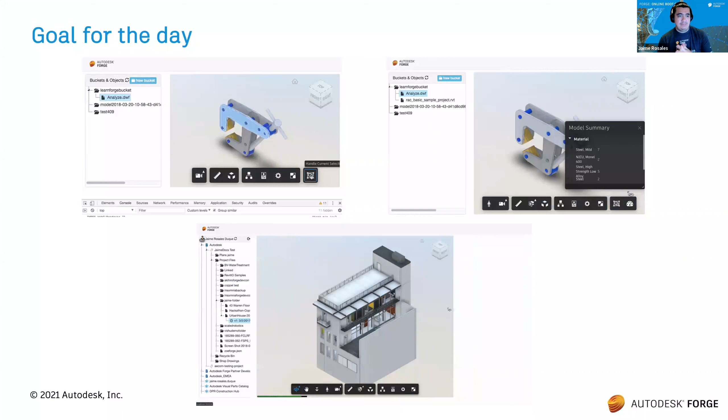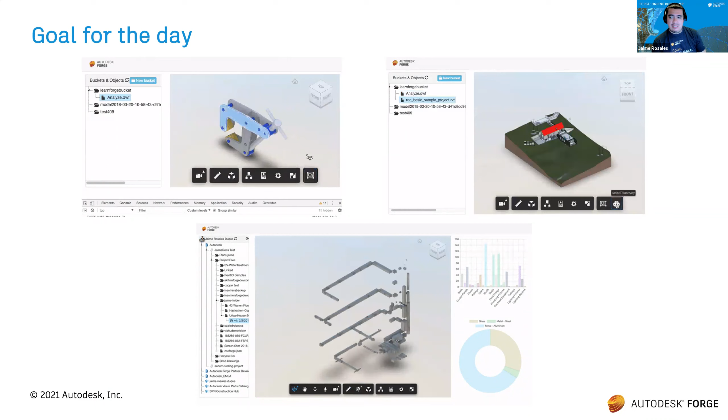So day 3, like I said, we're going to be customizing the viewer and adding dashboard functionality. What that's going to look like is basically this - we're going to be doing 3 things today, starting with the top left: adding a simple extension to the toolbar. What it does is when we select some objects in the model and click on the extension, it recognizes which ones are selected, giving us the IDs for those elements. Then we do a viewer isolation of the selected objects, making them the focus for the display in the viewer.

The second extension, top right, is basically getting access to a model summary. We know the models have a lot of metadata, and we want to focus on some specific data that comes from there. So if you have a manufacturing model, we might focus on the model summary of the material, but if we have AEC models, we can also focus on other categories like the type name and the material. So it depends what kind of model we're interacting with, but the data itself is present. Because we're preparing the data to display in the model summary, something very similar can be applied to the third example we have here on the bottom.

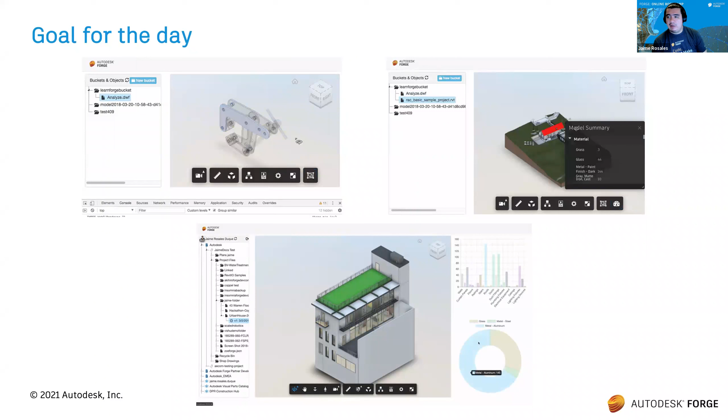Once we prepare that CAD data, we have a way to use third-party libraries such as Chart.js to feed those graphs with the metadata that we prepared previously. We can bring them into the graphs and do a display of the different categories, and at the same time have event triggering from the graphs to interact with the viewer.

Let's say we have a display in the graph about all the HVAC system, and we want to isolate and highlight all that into the model. We can select that part in the graph, and it will get isolated directly into the viewer.

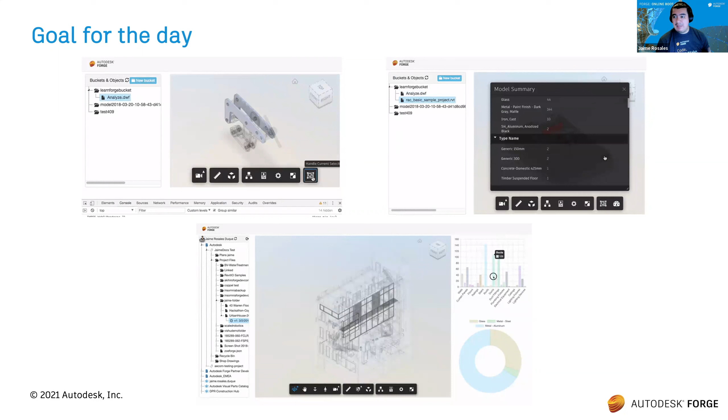It's quite useful, it's kind of like the beginning state of some of those interactions with the viewer, but there's a lot of benefit later on for you to expand into different functionality. Let's say you want to obtain all that data, bring it into some kind of ERP system, or export it to Excel or something like that. This gives you that kind of idea.

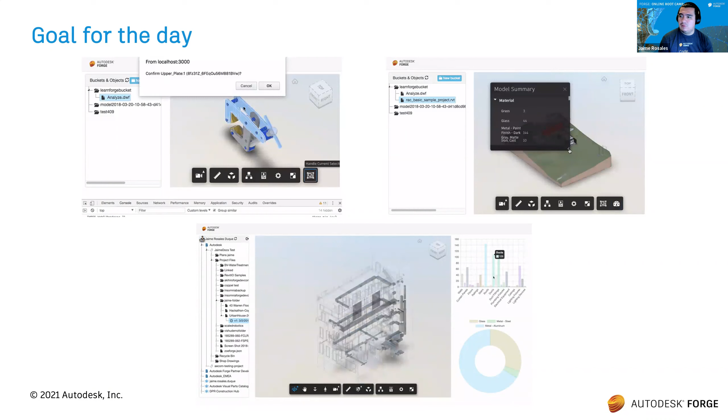We do have a lot of native extensions within the viewer, so if you stay towards the end, I can show you some of those extensions as a bonus. We don't normally do this, but you guys have been quite nice attending the event, so I can show you some cool extensions and functionalities that we have within the viewer already.

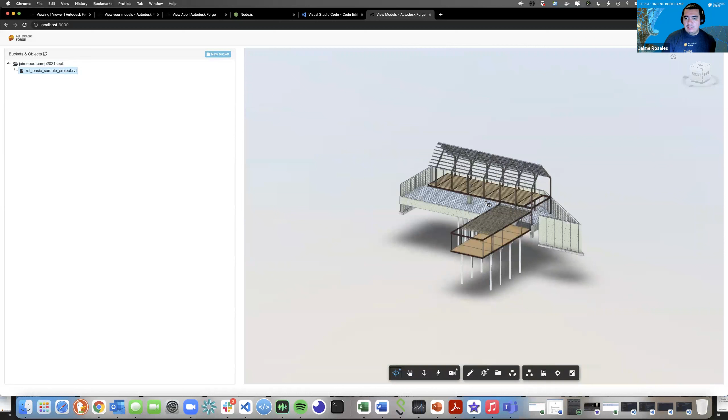Okay, so this is gonna be actually the end of session one, mainly that you need to finish session one with a project running like this.

Okay, so now if you do not have the project from the previous one, instead of going through - well, you have enough time. If you wanted to do it and just go through the steps, you could do that. But if you don't want to do that, we also give you the entire download project ready for you to use. So we have the Node.js one, and we have also the .NET Core one.

So if you go into here, you see that we are at the Learn Forge View Models public repo, and make sure that you have this section selected as Node.js. The links bring you to this part selected because we do have different kinds of versions here. But I'll say the Node.js one is something that's quite easy to work with.

You can download this entire project - download a zip, and then you can just extract this. You're gonna need to go through the README with the steps. And again, something important is that if you do not have Node.js, you need to install Node.js. And then we're gonna start adding the client ID, the client secret, in order for us to be able to run this project. So I'll say follow the README.

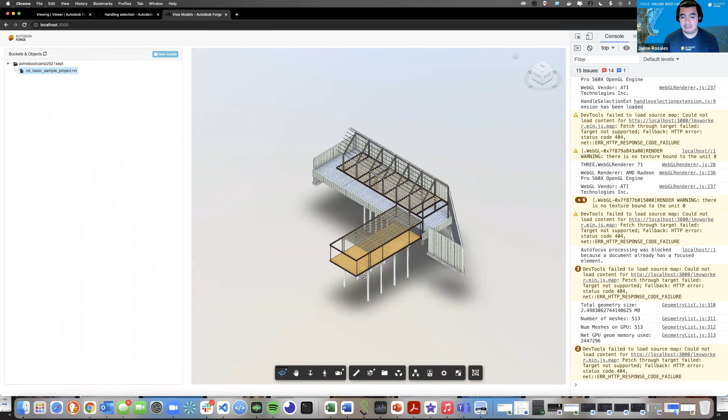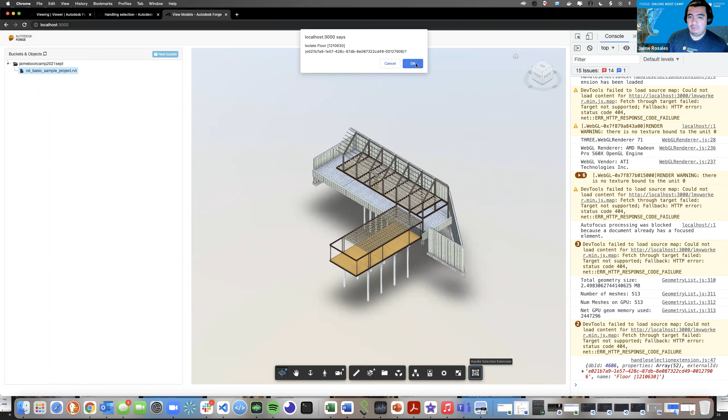But if we do select one, now we get a console and an alert of the isolated floor with this ID, and also the external ID for the Revit object itself gets shown in an alert message. We say okay, and then we apply isolation into that item. At the same time, you also see that we did a console log of the properties of that selected object, where we have the value.

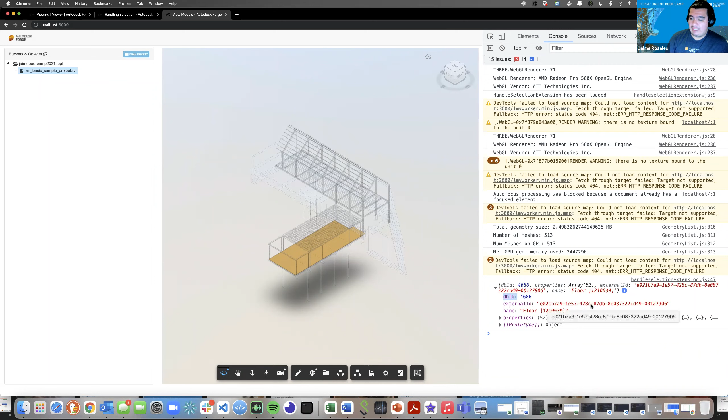Let me make this a little nicer looking. Okay, where we have the value of the DBID - this DBID is basically the database identifier of that object within the viewer. We also have a value for the external ID. If you're familiar with Revit, you know you have access to these kinds of external IDs that are unique for each object, where we also have access to the name, which is floor 1210630, and then access to the entire set of properties of that specific item.

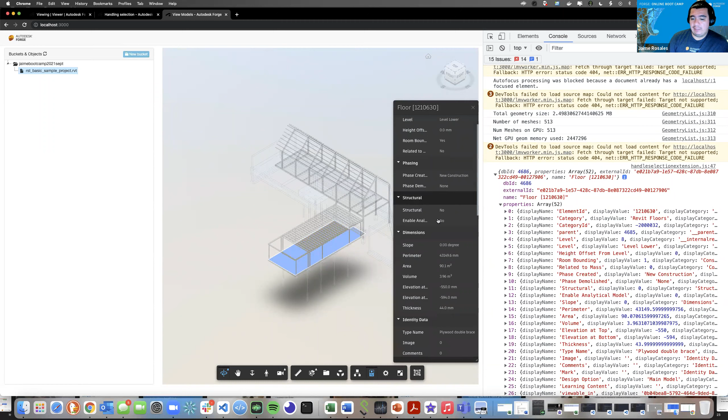So if we select here and open the tree, you see that we start getting a lot of similarities. This is what the viewer itself uses in order to populate the tree of properties - basically information into the viewer. So we have a way to access this. Let's see if we can spot one really quick. Constraints - a lot of stuff in here.

Perimeter, area, volume - so perimeter, we have perimeter here. We expand this one, and perimeter is in the display category of dimensions. Display name is going to be perimeter. Display value is going to be 43149.6 - basically it's rounding it up to millimeters. And is it going to be hidden? No, it's actually going to be showing up. And precision 1, type 3, and the units is going to be in millimeters.

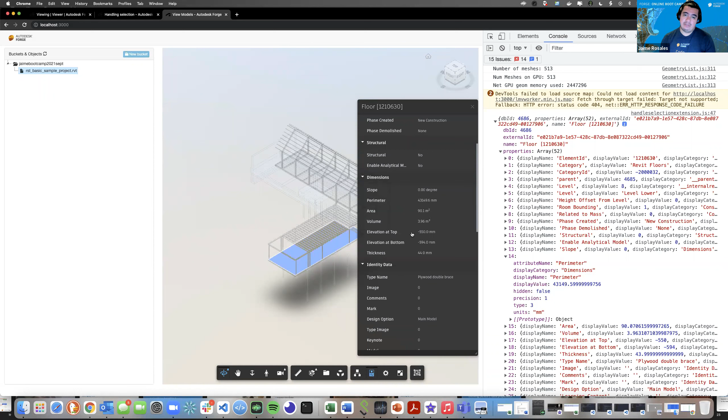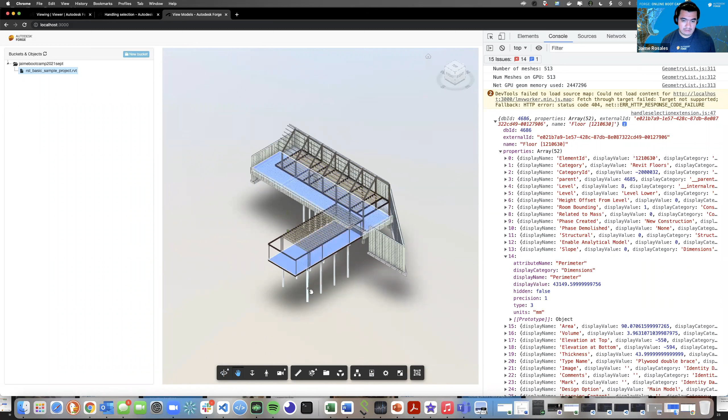So in the same way, we can access every single piece of information that's within this properties panel. Same thing again - if we do show all objects, and now we want to click this... wait, this one, this one, this one, and this one. And then we click this handle selection. Let me clean this up before that.

We're going to start getting one by one. So this is going to be floor 495352.

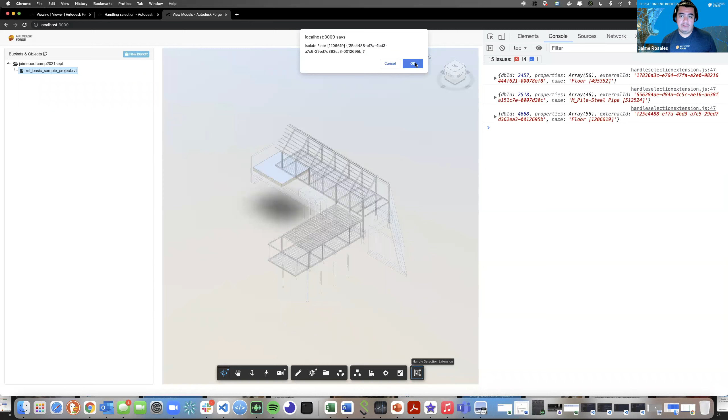Now isolate pile steel pipe, this ID. Then isolate floor, this ID. And isolate floor, this ID. So now we have again 4 items that we selected, and we get access again to all the properties for those 4 items that we just selected. That's basically the handling selection.

Okay, let me just quickly check what's next. We have... oh, that's it. On time, beautiful. For some reason I thought we had to go through some other stuff, but no, I think that's it for this session.

So let me head back to my slides, so I can tell you what's going to be next for you guys, which you just saw. Next up, you're going to be doing, well I already did, going over the extension skeleton. So you could go over that extension skeleton, and try it to get a little bit more familiar with how that extension works, understand a little bit more deeply how to use it.

And then you're going to be doing the selection handling, which I just showed you how to implement, the click handler on click event basically. List the selected objects, retrieve the object properties, and isolate the objects as needed.

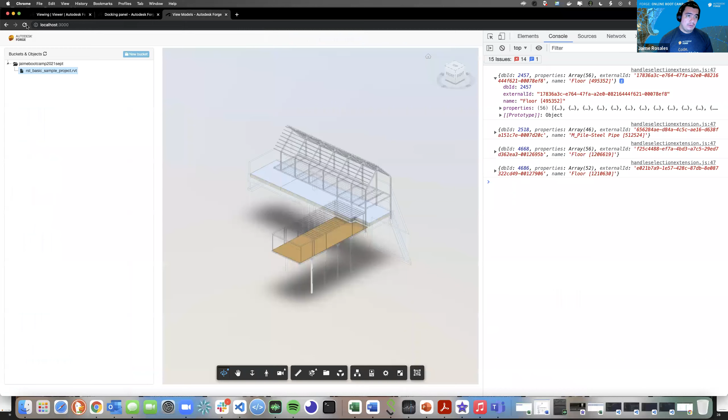Load the project. We're gonna see now a new console log, which is basically 'model summary extension has been loaded,' same as 'handle selection extension has been loaded,' which was our previous one. And as we see, it's in the same group, right? So it did not separate it. If we wanted to separate, we will have to assign this extension into a new group that we create, or in this case we wanted to group them together because they're our extensions that we're working on.

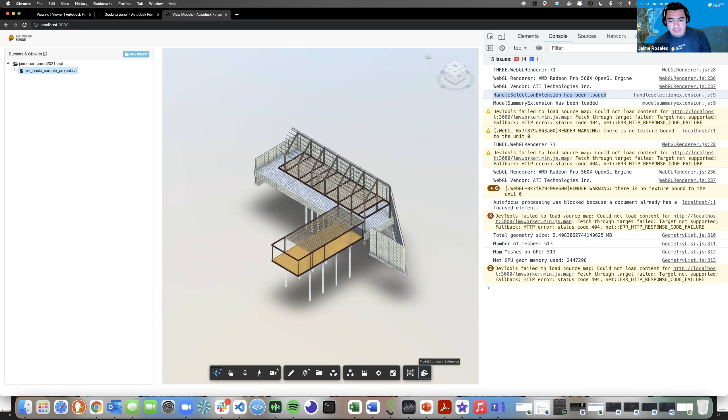So we keep it all on the same group that already exists, and we just add it there. And then also we added the icon, so we do see an icon in there, and we do see a tooltip as well. But if we click on it, nothing happens. Even if we select one of the parts, nothing happens. And the reason why is because we still haven't actually built the functionality that goes inside of the onClick event.

Okay, so that's going to be our next step. Going back to here, we're done up to this point. So now the enumeration of the leaf nodes - basically means that the viewer itself, all the elements in the model of the viewer, can be defined into different kinds of categories. Your models contain categories for like families, different parts, materials, and so on.

We do have a blog post that you guys can read about it that explains the enumeration of the leaves a little bit more in detail, and why this is happening - how do you get up to accessing the object tree itself of each of the individual parts of that model? I'll say this information, it's always good to just kind of go over and understand a little bit more about this.

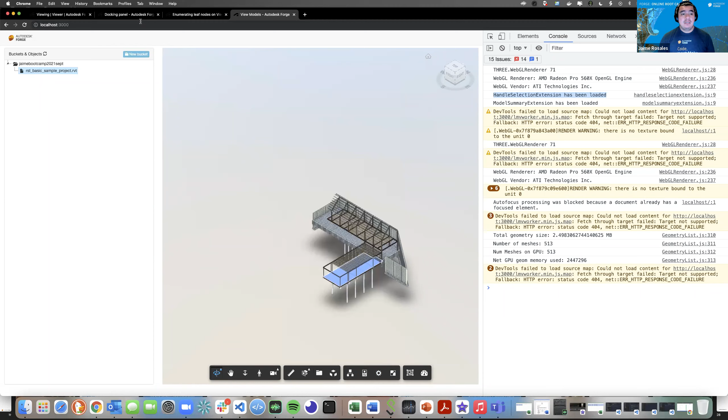We have the one for document browsers as well, so also the same dialogue, same kind of docking panel that's available within there. Even the settings too - settings is also another docking panel. So we can recreate these docking panels if we access that UI class for the property panel of the viewer. So once we have that and we add the property panel itself, our constructor will have information about what kind of title we want to give, a certain ID, the container, where it's going to go, and so on.

So let's start adding these parts. This we're not going to touch - we don't need to bring this into the project, because this is just an explanation of how the enumeration of the leaf nodes happens. But we will be having that inside of our onClick event, basically to recreate the same thing that we just explained above.

Okay, so if we follow the instructions, basically it says the extension will show the results of the viewer property panel. So copy the content to your extension.js anywhere on the file outside of the other functions. This is quite important, because otherwise we're going to end up with the model summary panel inside of a certain part, and it's not going to be able to be referenced.

Okay, so we're going to copy this, go into here, and if we start looking, what do we have that's matching the same kind of category as the other one, which is also a class? We have this one, right? So this one extends the Autodesk.Viewing.Extension. So something that I tend to do, it's quite easy - I close it, and this opens and closes here.

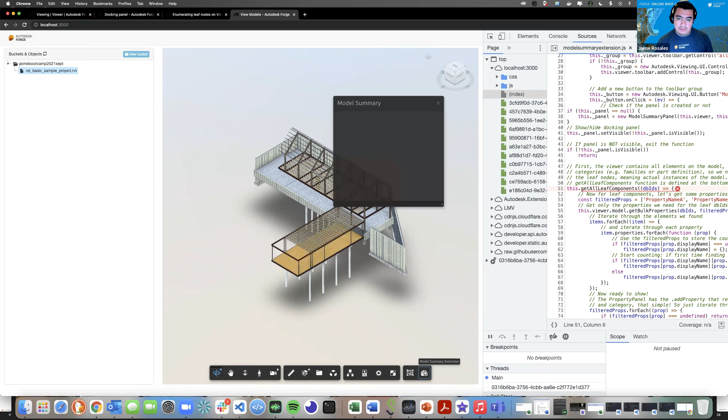Get all leaf components, the DB IDs. Did we? Oh, right, one second, let's see. Might have to get another model because this model might not have certain information that we need. Or I probably did something wrong, and that's what I need to look into.

So, this one's a little bit smaller. It'll take a bit of time to go up. Well, it can be because I did... hang on one second and see if I have to re-upload this one.

Yeah, so right now, sample, start translation in this, and while this thing translates, I can actually go back into seeing if I did not miss something or I messed up something, which could happen.

So this dot get all leaf components, DB IDs, get filtered. I think it's missing the get all leaf function, right? Yeah, this one at the top of the page. Yes, yeah, that's why I have you here.

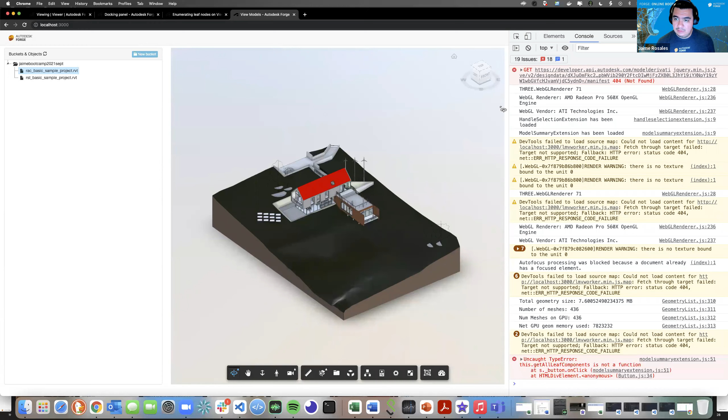It's almost there. So didn't have anything yet. Oh, 97. Alright, good. So now, still not getting it. Did I save it? I did save it.

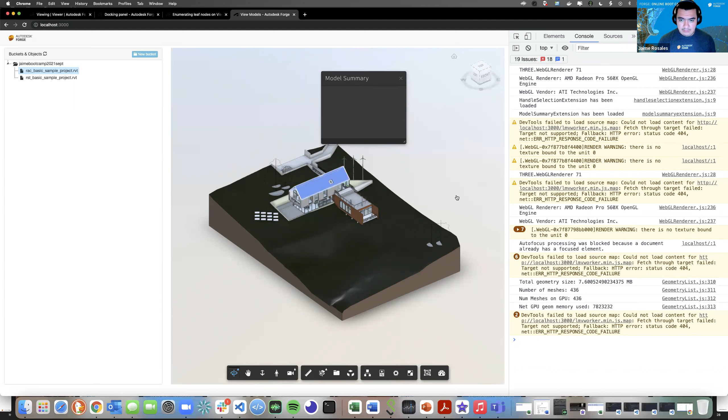Okay, so that's not going to error anymore. Funny thing is that it's not showing me anything, which is quite strange. This processing blocked. Let me do some debugging on this because it should actually be showing something, but it's empty, and I don't know why it's empty.

Okay, I probably missed something. So let's just back up.

Let's see, model summary, enumeration of the leaf nodes. We get this: get all leaf components. So we need to enumerate. It should be added to our extension class. This is based on the blog post.

So in the blog post, we do have the enumeration and the function get all leaf components with the parent. Let's see this, get all leaf components in here. I think it's in the right place. You can put it in your own file outside of the other functions.

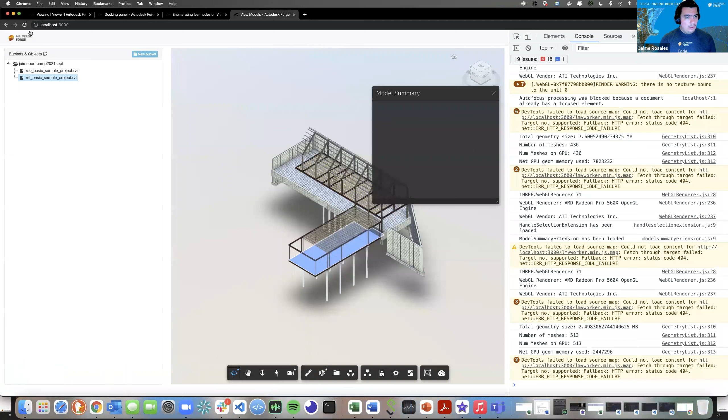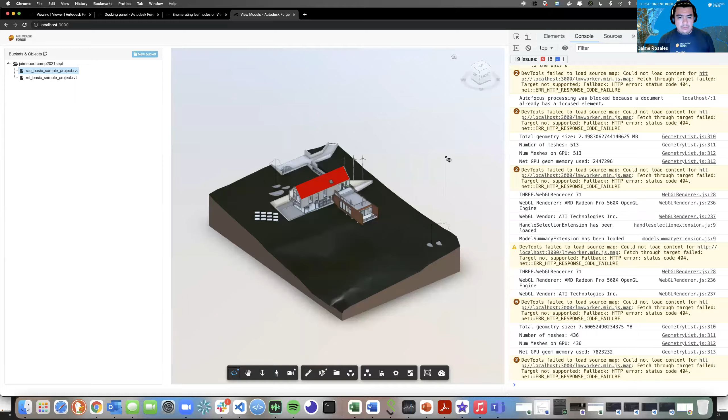Still not showing me anything. I'll do one more thing. I'm gonna have to do just a quick check. I want to see what's going on with this thing, because if there is something in the tutorial that got missed, I want to understand what it is and why it's not working. Because if I'm having this issue, probably you will have it too.

Lucas has his hand raised. Yeah, could you let him speak? Yeah, maybe, one second. Where is he? Lucas, you're allowed to talk, you can unmute now, Lucas.

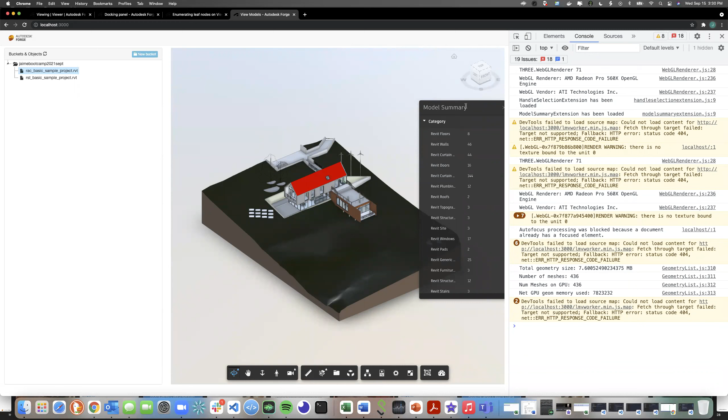Hi, I think that the problem is on the click function, because inside the on toolbar created... Yes, I remember now. As soon as I saw the filter props material that you placed, I remember that there's something we need to change, and that's the reason it's not working.

All right, so yeah, good catch. And you're going to receive the prize for this exactly, this challenge, at your address. Congratulations, man! You're the winner.

It's basically this part that I did not read at the end. So yes, as mentioned, you need to define the filter props appropriate for your models. The above video uses material, design status, and type name. And if we see what we are passing in here, this is what we need to change. So there is no such thing as a property name A or a property name B. Those are just default names for you to do what I did not do, which is reading this part after.

So now, if we look into the code, on the part that works now, the define filter props, in this case, I typed category and material. So this is the reason it was not reading any information before, because there's no such thing as a filter property called property name A and property name B.

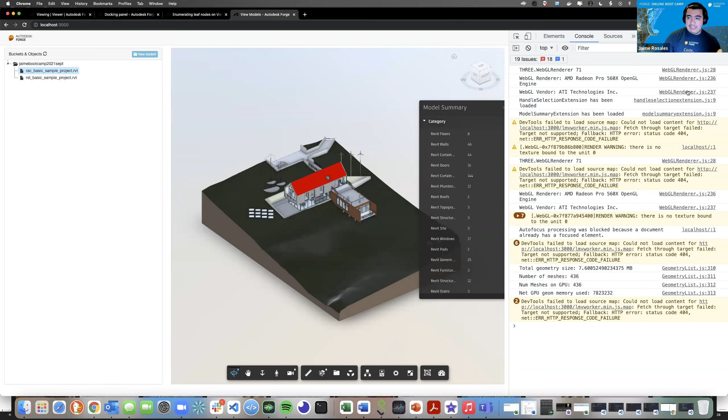So we do have access to getting all the information from the model in regards to the category. We know that this model has 46 walls, 16 doors, 144 curtain wall mullions, and it keeps going like that. That's going to be on the category.

But now when it comes to material, we know that material properties match 44 times for the glass, iron cast, aluminum, metal, and so on. And we could keep adding more information and more properties into here.

It's basically from the part that we missed. So we can start adding here, comma, and then something else, comma, and another one. Or we can even give in the docking panel the option of a drop-down menu, for example, so we can populate all the different values available per the model. Then based on the drop-down, we can select - oh, I want to see material right now, or I want to see category right now, and so on.

Okay, so that's going to be it for this model summary extension.

So let's move forward with the other part, which is going to be the dashboard functionality. And before we move in, I do see a chat message - Lucas, it's running perfect. Okay.

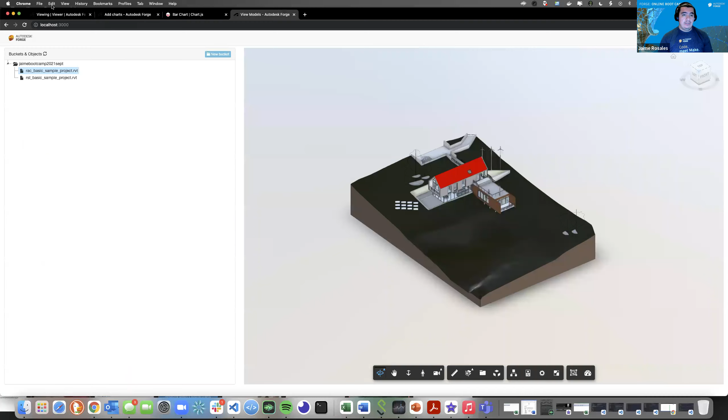Okay, so now let's go back to here. Let's refresh this, and I think everything should be up to where it needs to be. So we go back here, we refresh. And as of now, nothing has happened, because if you remember, we have an event listener that will trigger the dashboard as soon as we have the model completely loaded with the geometry.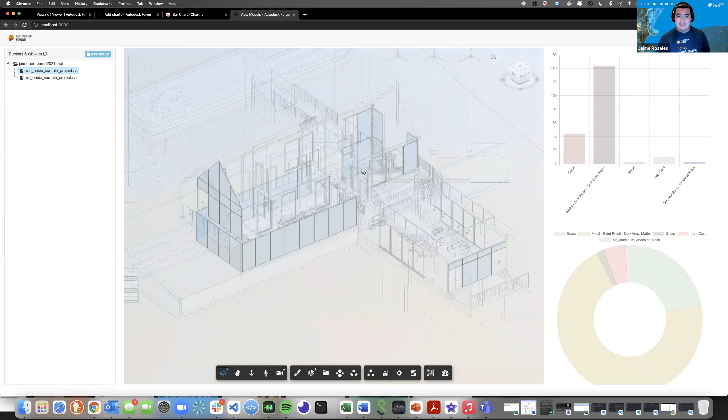So if we select one, we get the model, geometry is loaded, and now we've got the bar charts and the pie chart. So if you see, we can get tooltips of this. So let's say everything that is glass - now we're going to isolate everything that is glass, and now we're able to actually see it, okay?

So now, same thing for the pie here, because it's basically the same kind of data, the same kind of property that we selected. Now we can probably try another one.

We know that Revit files themselves have something that's called category. So we can go ahead and actually go into dashboard here. Let's change this one to category. Refresh this one.

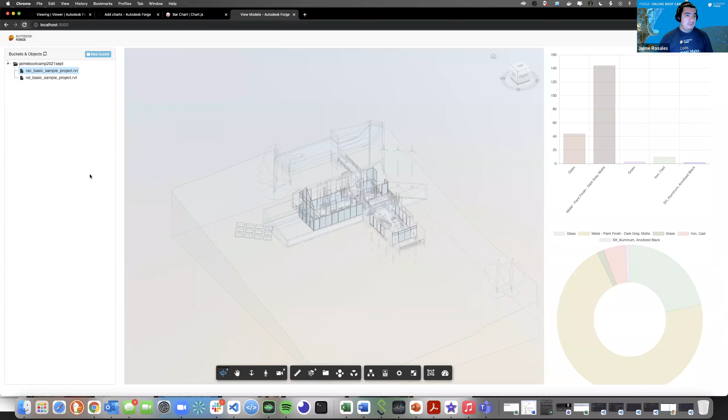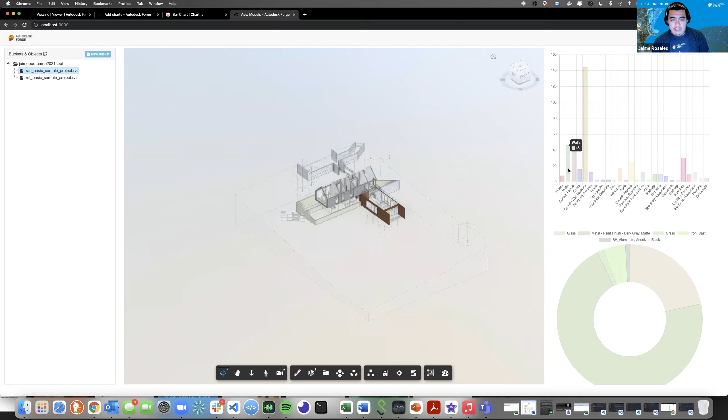Okay, so now you see, I do have something different than the one that I have below here. And I have category now that has information about everything that's a floor, everything that's a wall, all my doors - so I have doors being highlighted. These are basically highlighting everything that's a family itself. So I'm pretty sure I have one for furniture here. Yep, I have it here. So now I can visualize all the furniture, okay?

And that's basically it when it comes to adding dashboards into your application. So we prepared the data, we curated that data based on the kind of property that we're selecting. Something that can be an expansion later into here would be something like the BIM 360 reports.

So if we sign in... test... go to files, find my folder. Let's do this one. So this is basically a combination of that, but now we have a chance to get access to all the different properties that we're able to use.

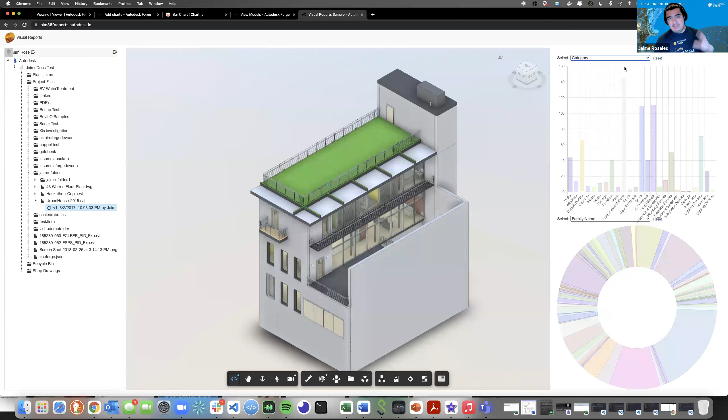This is the reason I know this one. So we can change it from there, we can change it from that kind of drop down. So you can have a drop down that basically populates everything in there. So that way you don't have to be changing it manually inside of your code. You just basically give the user the option to do something like this.

And the code to do this is available in our GitHub. If you look for the BIM 360 reports app, you can find it in there. And you're going to start seeing a lot of similarity when it comes to the charts part.

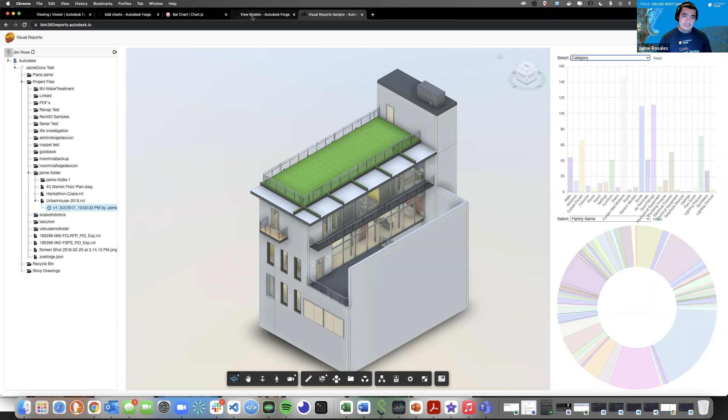Okay, so before we move into being your turn, I said I was going to show you some extensions that we have available within the viewer. So in the viewer documentation, if you go into documentation and look for the viewer itself, go down to API references, there is a section called extensions.

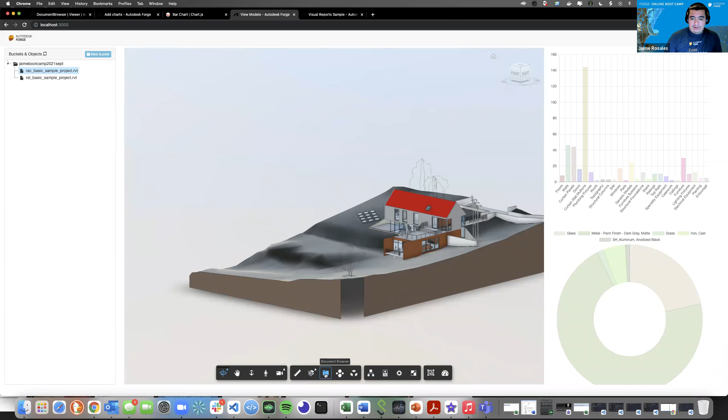Extensions itself, you can make use of different extensions, like for example the document browser. If you remember, a model for Revit does have different kinds of documents available, so you can visualize them in a thumbnail and switch from one part to the other. You see this also reacts because we're loading a new model, right?

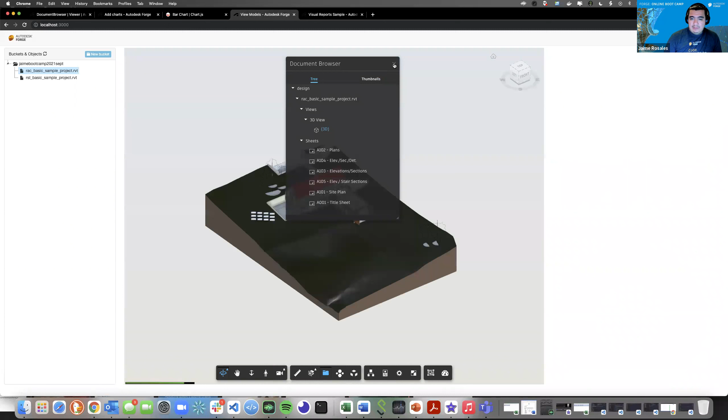And same way, we can go back into the 3D one. Once that geometry is loaded, we get everything loaded again, which is basically the same data, but the viewer itself, every time there's a new geometry loaded event triggered, it will reload the data. So you could use the ones that are part of this, and start looking into the different methods each one has.

There are other ones, let's say the split screen extension, so if you want two screens of the viewer next to each other, you can use something like this. We also have a minimap extension, so if you want gaming-style navigation with a minimap, you can add that.

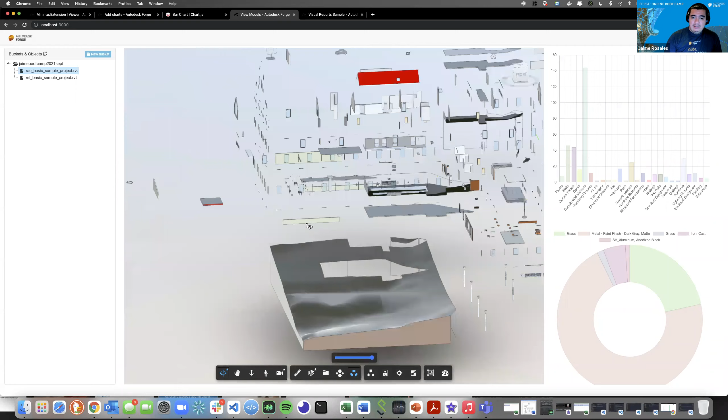And there's another one that isn't listed here, but we know about it, so this is kind of like your bonus trick to take home. It's called visual clusters. If you're familiar with the exploding model feature in the viewer, it basically breaks the model apart so you can see each individual piece. But when it's a large model, you're just going to see a lot of pieces.

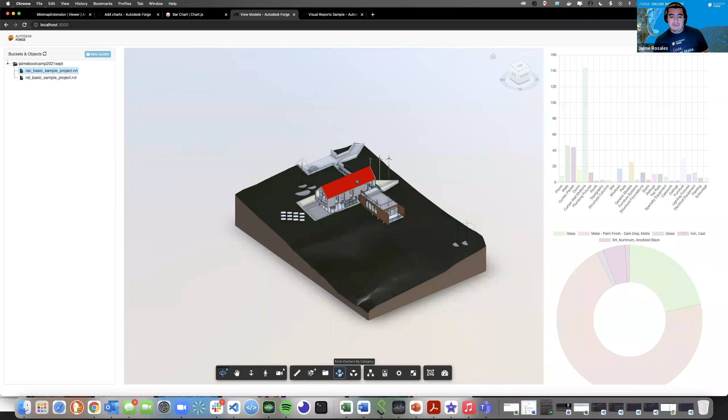But what happens if we could do something like a controlled explosion based on a certain kind of filter? This is the reason I switched this bar to category, because we have one called visual clusters, and it focuses on the category. This only works for Revit files, but if we set this, we can do a controlled explosion letting you visualize everything in different categories.

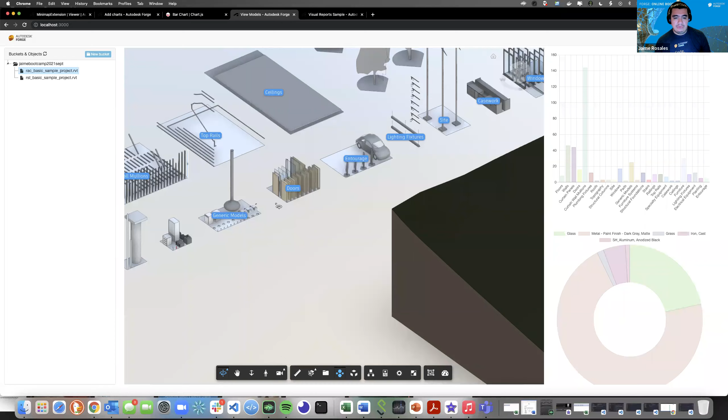So let's say you're a supplier of doors, you can see the different doors available within the model and focus into that part. Something I found out not too long ago, which was quite interesting, is that you can, for example, select the doors from here, so now all the doors are selected.

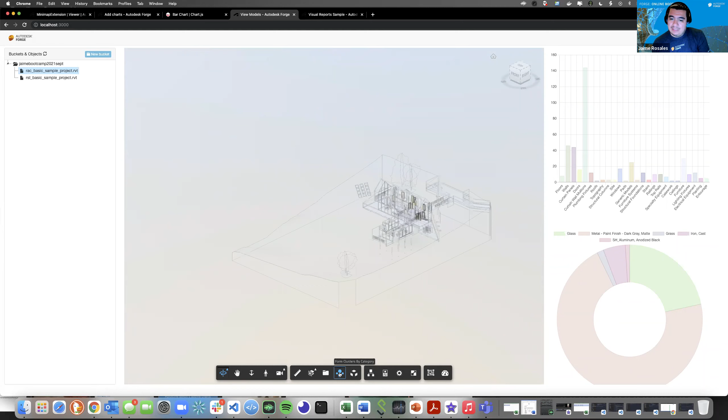If you do a visual cluster with a category selected, it will only put everything of the stuff you have selected—it won't break the whole model apart, it will just focus into what you got selected. So if you see your model now, it's actually quite nice, but the doors are not part of it. I don't know if this was intended when it was created, but I found it quite interesting.

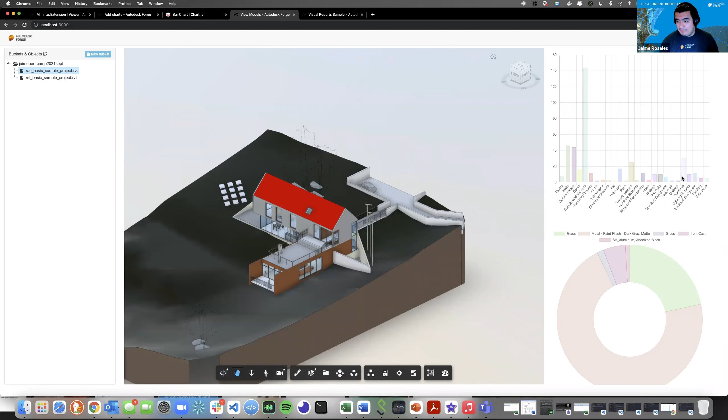Because we can focus into another category and then just do all the furniture, and now we can start focusing into the furniture again. So yeah, that's a little bonus for you.

You can enable this extension from the viewer code. If you go into the Forge viewer, in the same way where you enable extensions, you can do Autodesk.DocumentBrowser, which I showed you, and then also Autodesk.VisualClusters. Let me copy this for you too if you want to test it out—just remember they need to be done on a Revit model, otherwise you won't have access to that. So here you go.